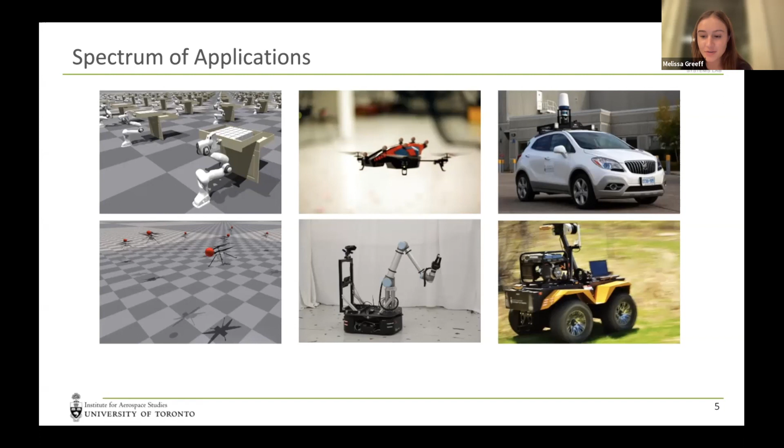However, there are a lot of challenges on the road towards deployable learning controllers, and these include sim-to-real transfer, computational efficiency, and most importantly, safety. In recent years, a wealth of research has explored how to extend safe and robust control frameworks with learning, and how to scale RL beyond toy problems while encouraging safety.

Let us look at a few different approaches very briefly. Classical control approaches fall into a category of model-driven approaches, and they typically consider a set of predefined robot dynamics and environments and design controllers for those conditions. Only a small portion of the world can be accurately modeled, and there is a clear boundary between what can be accurately modeled and what is safe and what cannot be accurately modeled. So it is possible to give guarantees within specific contexts, but generalization, for example to new operating conditions, is very challenging.

In the second set of approaches, or data-driven approaches, they learn a model of the world over time by collecting data. However, there is usually no clear boundary between what can be accurately modeled and what cannot be. So this can allow for high generalizability, but providing guarantees is usually challenging. Finally, the combination of the two promises generalizability and guarantees. Using a model and learning together allows us to improve the model of the world over time by collecting data through explorative actions with a predefined risk.

Thank you so much. Antonio, currently at UC Berkeley, also worked with Professor Scaramuzza in Switzerland. He was one of the co-organizers of the DodgeDrone competition this past weekend, I think. Their work essentially was one of the sources of inspiration for our competition, and he was very instrumental and helpful in organizing and defining the initial prospects of this competition. So please.

Thank you. Yeah, I guess you can see my screen. Otherwise, please tell me if there is any technical problem. Yeah, so my name is Antonio. I'm now a postdoc in Berkeley, in the Berkeley Artificial Intelligence Research Labs. I work with Jitendra Malik, basically at the intersection of computer vision and robotics. I've had a little bit of experience with IROS robotic competitions. I'm very happy to be involved in this one. And I'm now trying to explain why. Why do I like competitions?

I'll start basically with this statement that drone navigation is a research problem. It has many applications like search and rescue, delivery, exploration. It is very important because most of the time we have perception-based control, right? The drone has to learn from its senses where to go and how to get there. And these systems are safety critical because if they make a mistake, things are going to go bad. Drone navigation, in particular in this application I'm showing here, is one of the places where 98% usually is not enough, right? If 2 out of 100 times your drone falls down out of the sky, then it's going to be a problem for the products you're delivering, or could be a risk for the people working around.

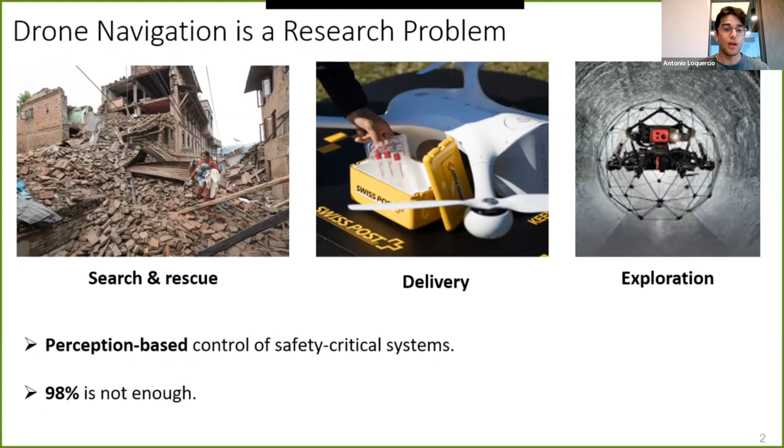So the thing is that we are still in a very open research area where core components are still unclear. It is unclear what kind of representation we should use for our navigation algorithms, for perception navigation, like explicit ones such as maps, metric systems, VIO, or more implicit ones like what we get from a neural network.

Also, it's unclear what kind of sensing best fits a drone for which kind of task, like RGB, depth, or small lidars. And again, what should we prefer? A more generalizable learning-based approach or a more safety-constrained model-based approach?

Basically, what we would like to understand is where to be on this line between end-to-end, usually pursued by big companies like DeepMind and OpenAI, and the classic perception-planning approach, which is instead the forefront of all successful robotic companies.

So that's why, to answer this important question, I think competitions are very important, and the reasons are clear. These are probably the thing that made the computer vision and natural language processing community make so much progress in the last decade — the fact that people have standard metrics so we can compare according to the same numbers, sequestered test data, and public leaderboards. So when I write a paper, I don't have to go and run your code again, the numbers are going to be there.

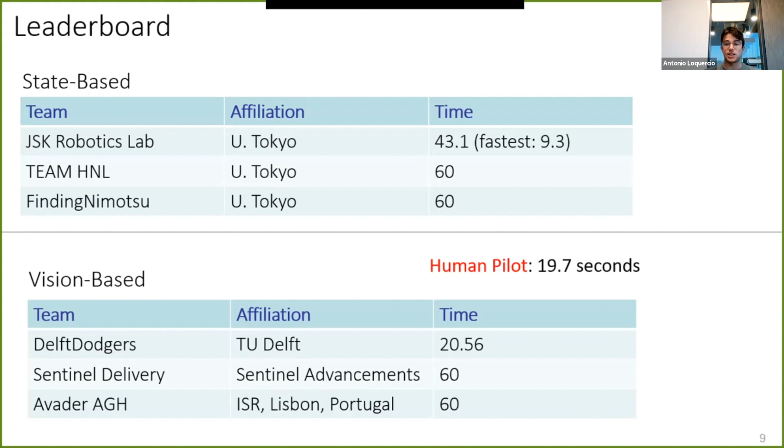However, something I would like to show is a video. Let me see if I manage to play it. No, okay, so the video does not play, I'm sorry, classical technical problems.

Competition is good for research, but also for the networking aspect of it. And also something else I did not expect from the Dodge Drone competition is that it had a much greater educational value than what I expected. I keep receiving emails from participants who, for example, want to use this as part of their CV for grad school applications, or people who want to use it for writing papers, this kind of stuff. So I think this is maybe even more important than the competition itself, like motivating students to get in touch with the problem.

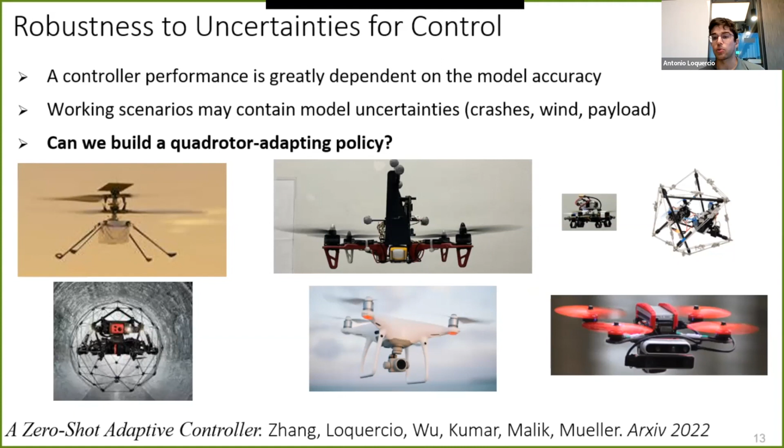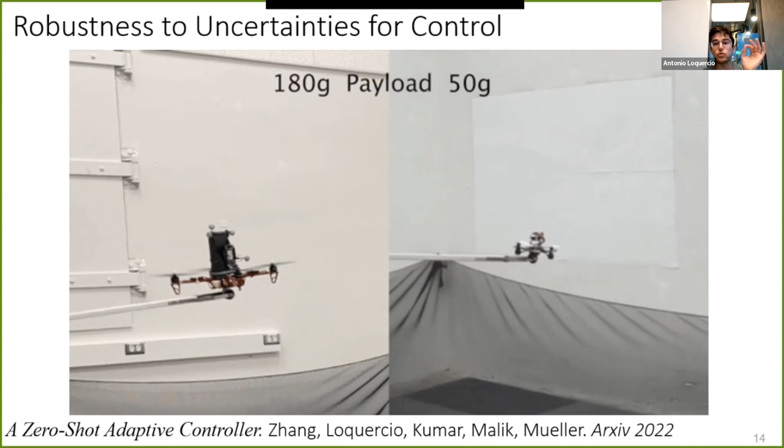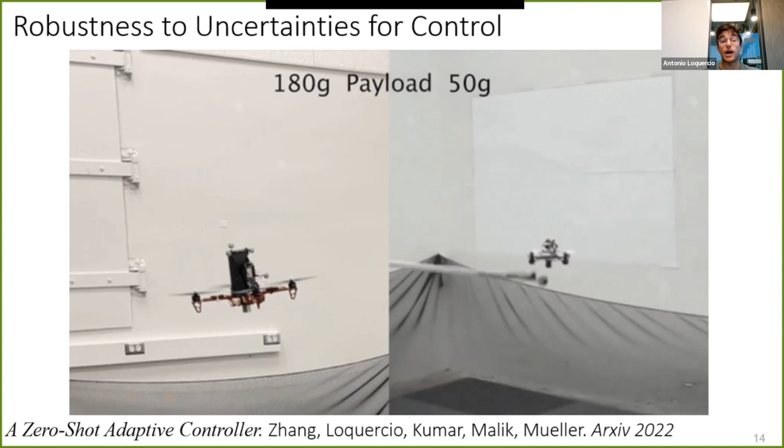And this is also very important for applications, because these uncertainties are problems when, for example, we crash, some propeller gets damaged, there is wind, or a payload is hung. We basically studied this problem - it was one of the first problems we addressed when I arrived here in Berkeley. We approached it using reinforcement learning, and we found out, I was actually very impressed, extremely good results. We had to use particular approaches for allowing the policy to adapt to the quadrotor. But I was really impressed that a single policy could control basically all kinds of quadrotors that we presented to it. It was also robust to disturbances, mass uncertainties, us pushing and pulling the quadrotor. So it was actually very good.

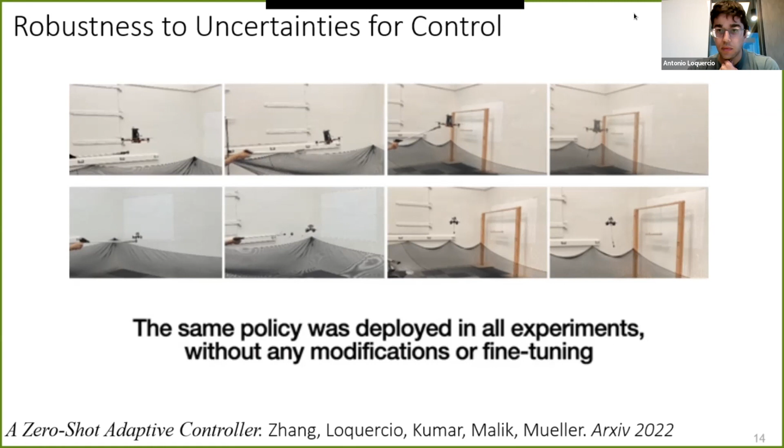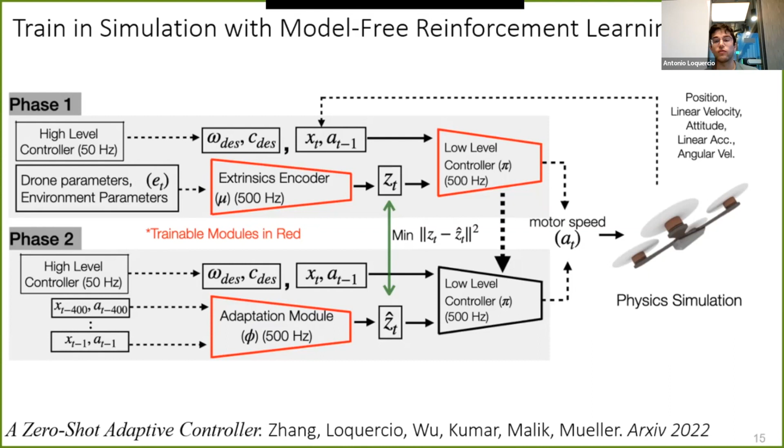We trained it with model-free reinforcement learning, PPO, in a 2-stage procedure. In the first stage, we trained the policy with information about the drone parameters, like its mass, center of mass, the strength of the motor, and so on. Then in the second phase, we estimate a latent representation of these parameters, a form of latent system identification, using a history of states and actions. So really as simple as that.

My biggest surprise was that, particularly in the most difficult cases, like when we would push the drone, or some of the motors would fail and have a loss of efficiency, our approach worked much better than traditional adaptive controllers, like the L1 adaptive controller, both in terms of success rate and in other metrics, like how well it keeps its height.

That work was really inspired by that competition. So to quickly conclude, I think competitions are extremely good. They foster progress, as they did for me in this last work I presented, but they're also very important for education and networking.

This is a bit of advertisement for my latest work, which surprised me in the fact that reinforcement learning policies can learn very robust approaches that are robust both to extrinsic factors, like wind, or intrinsic factors of the drone, like changing hardware. With this I conclude. Happy to take questions, and thank you for your attention.

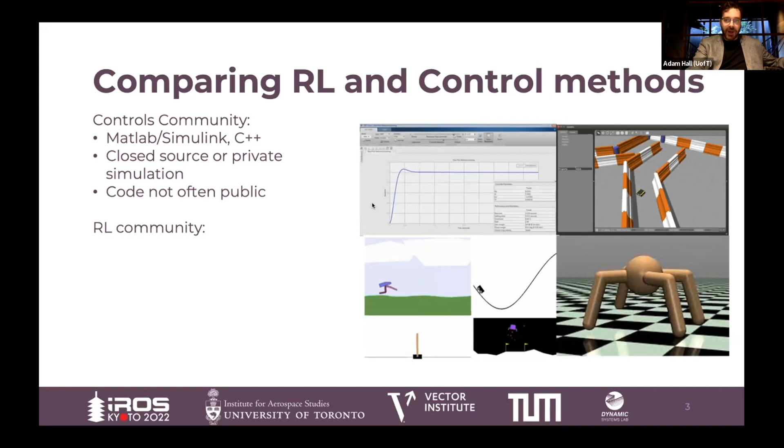There's a problem, however, as tracking progress in this field has been very hard across the two communities. One reason is the controls community likes to use tools like MATLAB, C++, and often closed-source simulators, and their code isn't made public as frequently as in the reinforcement learning community. The reinforcement learning community likes to use Python, PyBullet, OpenAI Gym, more open source, and different types of simulators. What we've seen is it's really hard to make comparisons when these algorithms are implemented in different code bases and software suites.

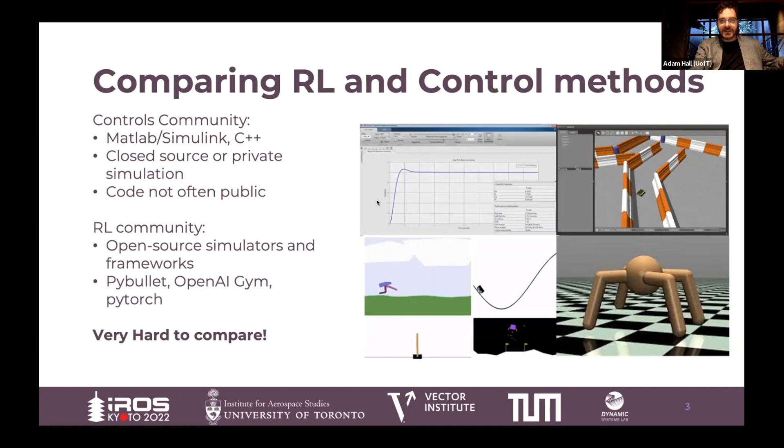This was a major motivation behind Safe Control Gym. The idea is Safe Control Gym is an environment for both the reinforcement learning and control communities. Our framework provides a symbolic prior model of the dynamics for each of our environments, as shown here: the cart pole, the 1D quadrotor, the 2D quadrotor, and the 3D quadrotor, which many of you used for the competition. These symbolic prior models are really important for many control-based approaches.

In fact, they're often required as some sort of prior model. So additionally, we provide physical and dynamic disturbances, such as changing the mass properties of the system or injecting noise onto the inputs or observations. One example here is changing the pole length of a cart pole, and there are many others you can implement through Safe Control Gym.

Additionally, we also provide symbolic representations of safety constraints, like state constraints and input constraints, which is not commonly found in other gym environments. Our framework is freely available on GitHub, as many of you know, and we encourage contributions, as many of you have already started to do.

In more detail, Safe Control Gym can be broken down into controllers that interact with environments. Environments are initialized with a visual model defined from a URDF file in a PyBullet environment. The user defines these through a YAML file interface, a common Python-style format, though not limited to Python. Through this YAML file, they can also define a specific task they wish to perform, such as stabilization or trajectory tracking. A symbolic model is also generated alongside the PyBullet model, acting as a prior model that the controllers can use.

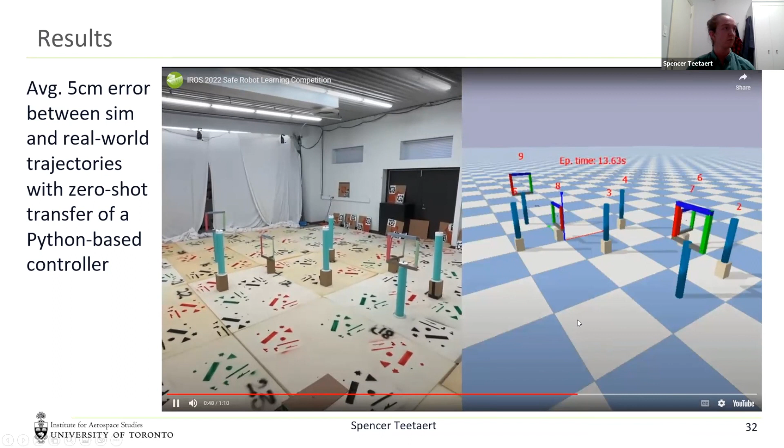Effective Sim2Real of a gym-like environment is a very powerful enabler to research in control and model-free RL. So future work for this project includes working with Bitcraze to merge our PyCF firmware with their Python wrapper into the main CF firmware branch, doing more work developing controllers with and validating the Sim2Real pipeline, and the addition of more advanced state estimation.

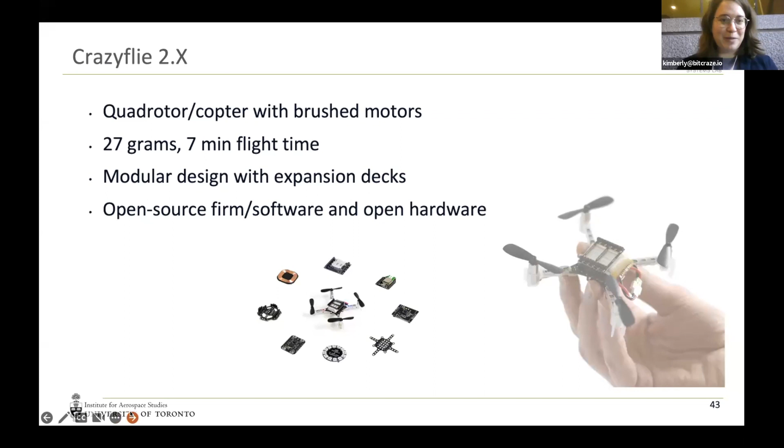Okay, so I'll explain a little bit more about the decks itself. We have a flow deck, for instance - for the competition itself there was motion capture, but you can also do positioning, relative positioning, with optical flow and a range sensor. So the flow deck, or technically the flow deck version 2, has an optical flow sensor and a range sensor, and then you're able to make it fly without any external positioning system. So you can fly it at home, which is really handy.

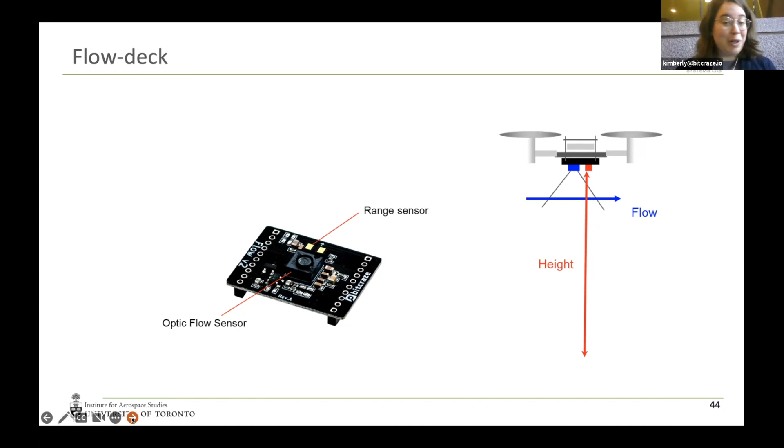Something I also presented during the ROSCON presentation last week was the multi-ranger. I combined that with Crazyswarm2 to do a little bit of SLAM, off board of course - I connected it with the SLAM toolbox. Technically you have 5 of these time-of-flight 1D sensors pointing in 5 different directions, and you can either make a map out of it, or just do very reactive obstacle avoidance with it as well. I used them during my own PhD research to do wall following, so they're all fun to work with.

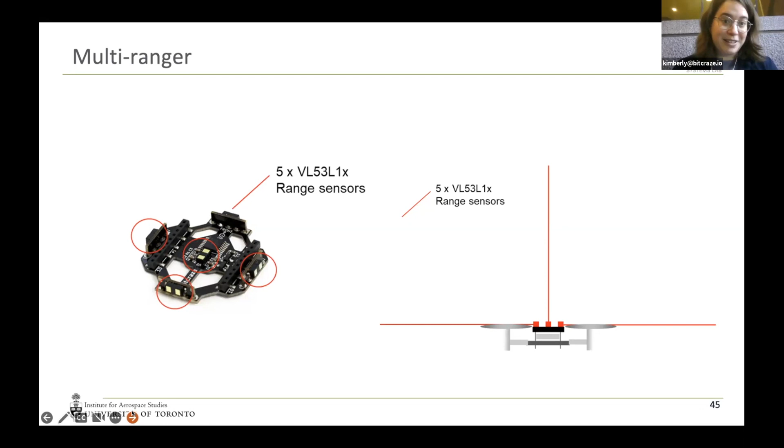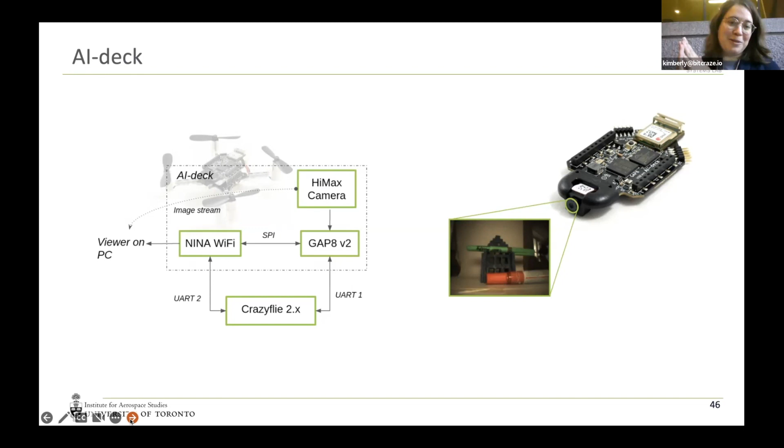So that's very much the hardware. The prizes I'm going to present for first, second, and third place are a combination of those 3 decks and, of course, a Crazyflie. So if you can go to the next slide, I will present the prizes.

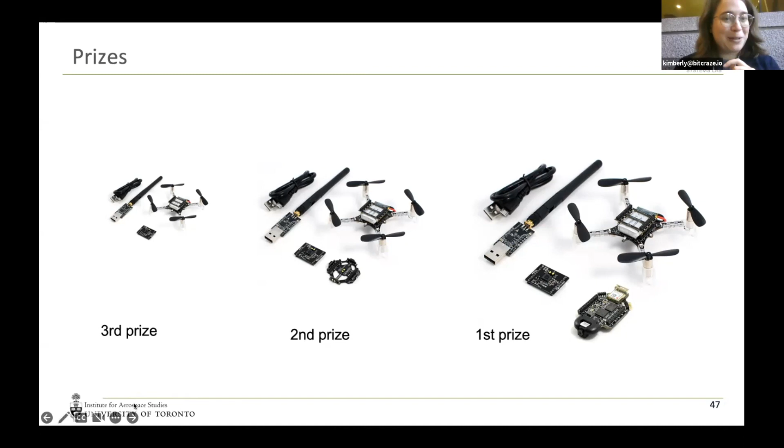Yeah, and I know Wolfgang was on paternity leave. Yeah, he's coming back soon. But I've been, if you look at the commits, I've been pushing a lot of commits. Nice, we'll be in touch with that.

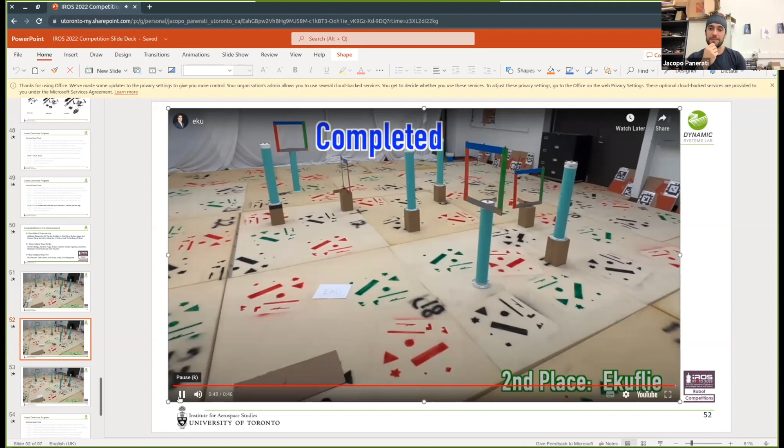Thanks, I think Gerardo is the one - can you hear me? I can hear you, and you should be able to share a screen. Okay, give me a second. Thank you. Can you see a presentation there? Okay.

First of all, thank you for the competition. It was really fun. We're team Ekuflie. We are all members of a company called Ekumen, that's where our name comes from.

We are a company that develops software for robotics applications, usually around ROS, and we also have software development for other areas such as mobile and in some cases web, but very frequently also related to robotics.

As part of the company, we have a small interest group we call research and development, that we use to research topics that maybe we don't find every day in projects, that we are interested in learning about, so we take the chance to do development and research around those areas. We have lately found that competitions are a very good vehicle for that, because they provide us with a very scoped problem that we can research and try to solve.

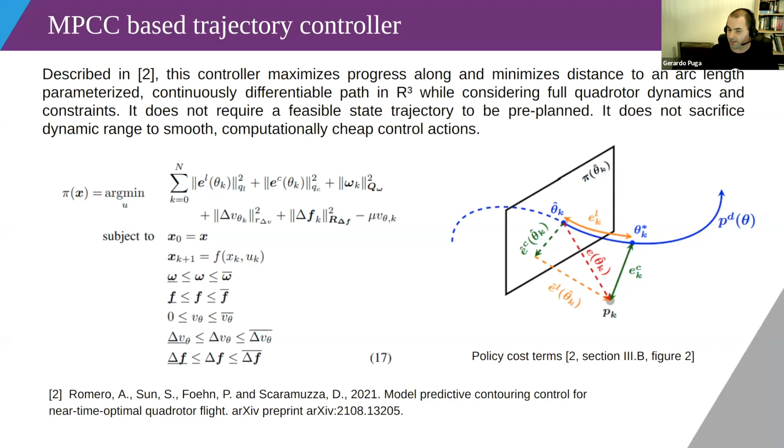For that, as I said, it is an MPC type of controller. It has a function that needs to be minimized on each iteration. Once that function is minimized, the control action that results from that optimization is usually applied to the system — in this case, the drone.

For MPCC, the three main costs associated with the function that is minimized are the contouring error, the lag error, and the progress cost.

The contouring error is the tracking error, or the distance from the drone to the path that we want to follow. The lag error is the distance along the curve from the drone to a point that is moving along the curve that we want to minimize. We want the drone to keep up with that point moving along the curve.

The progress cost is the incentive for that point to move as fast as possible along the curve, and that's the one the drone is chasing.

There are a number of other costs also in the cost function. Those are mostly for smoothing the control actions. In our case, we also have some others to improve the tracking when we were near obstacles and when we were getting through gates.

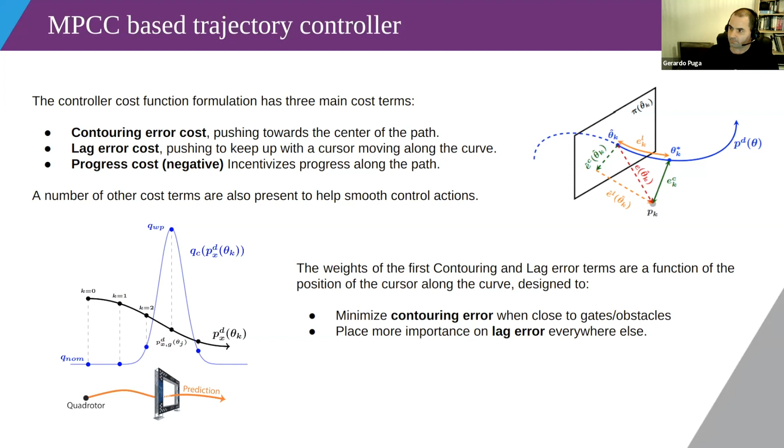We have a number of implementation considerations. The first is something I already mentioned: since this is implemented in Python, the algorithm that does the replanning, as proposed in the paper, is too slow to execute in real time in our case. That's why we decided to only do it once at the very start of execution.

Initially we wanted to do it in real time. That proved to be not feasible. Even though we applied as many optimizations as we could, reduced the number of samples generated, solved as many expressions as possible in closed form, and simplified collision checking, we still could not execute it fast enough.

So we decided to execute it only once, and that had a cost for us, because since we cannot replan while moving from gate to gate, we cannot replan once we know the true pose of the gates. So we needed to come up with an alternative solution to this.

The solution we came up with is to apply a small patch to the curve when we are close to the gate. We basically add a Gaussian function to the pose of the curve with a correction to the true pose of the gate when going through it.

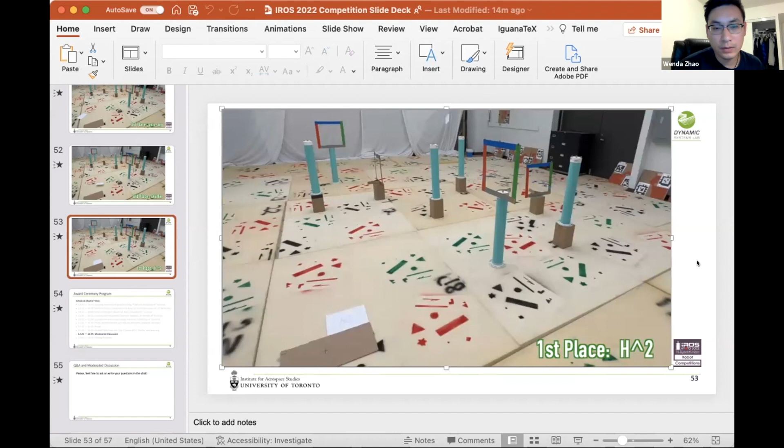Okay, so this is team H Square, which got first place in our competition. In the real world experiments, it's actually pretty promising, and it executes the trajectory without collision in the shortest time.

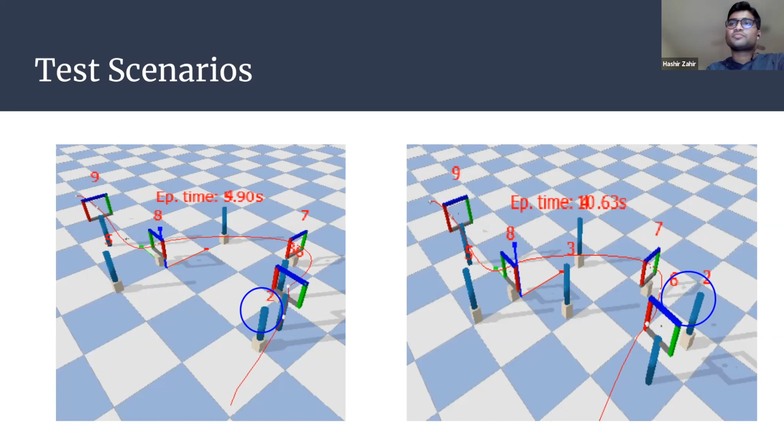Looking at some test scenarios, we can see that even with obstacles pretty near the gates or directly in the path, in general the newly generated spline is relatively smooth, and the drone is still able to travel at reasonably fast velocities.

Okay, now I'll pass on the time. Hello, yeah, so I'll go on to talk about the waypoint interpolation methods that we use.

So instead, we decided to go with the quintic polynomial to stitch all the waypoints together on all 3 x, y, z axes. This allows continuity in position, velocity, and acceleration of the drone.

So as for the yaw direction of the drone, we decided to make sure that the yaw is always tangent to the trajectory, such that the drone is always facing forward in the direction of travel. This is because typically for drones, there's a camera mounted, and we wanted the drone to face the direction where it's going and to be able to see what's in front of it.

We also had a constraint by setting the path to be perpendicular to the gate when it's going through the gate. Because the yaw direction is determined by the tangent of the trajectory, this constrains the first derivative in the quintic interpolation.

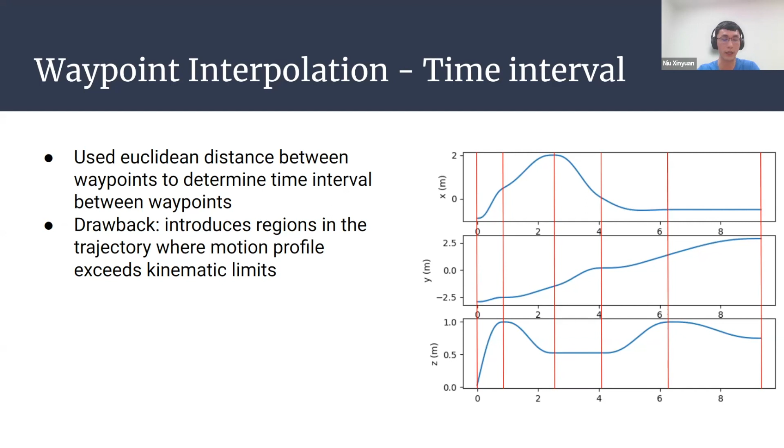So as for the motion profile, we decided to use a linear segment with polynomial blend, more commonly known as an S-curve motion profile. We have kinematic limits of velocity, acceleration, and jerk. These values for velocity, acceleration, and jerk are actually user-defined limits.

Of course, if we define them based on the model parameters, they will be the best, but you do not have to define them perfectly. There can be some amount of error there, and this will also be dealt with in the later parts.

The reason why we went with this kind of S-curve motion profile compared to a polynomial profile is because the S-curve profile will actually spend a much longer time at a higher velocity, and thus is able to complete the trajectory at a much faster rate than a polynomial motion profile.

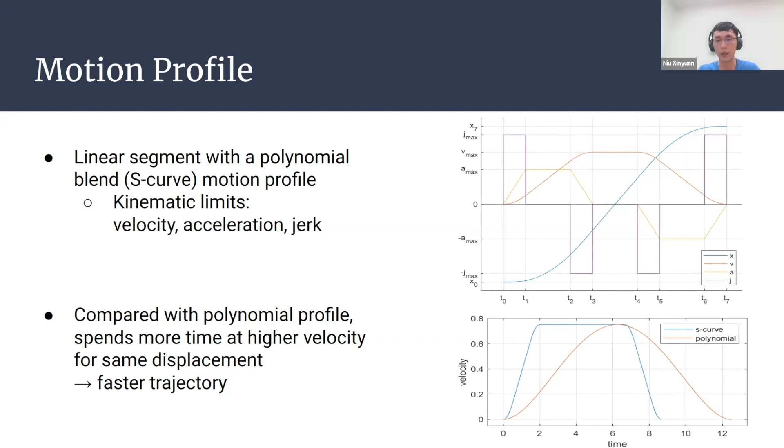This final trajectory is actually scaled by the total path length of the interpolated path to ensure that the kinematic limits are being met.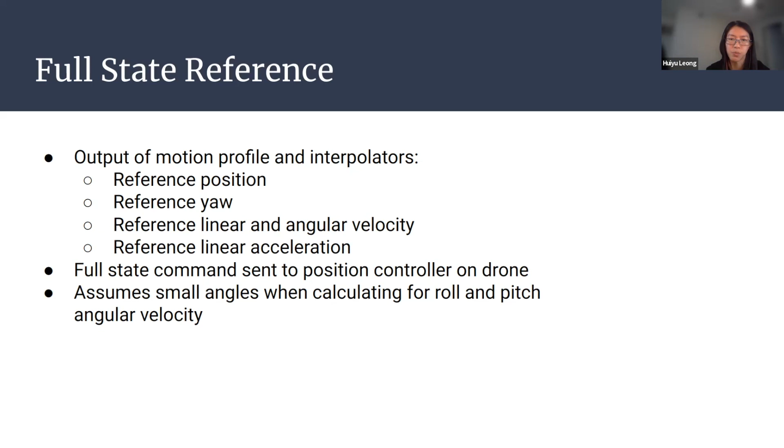Next slide, please. During the challenge, we found that our observations could be noisy at times. If given more time to work on the challenge in future, we would implement Kalman filtering for the feedback of the sensor data. That would also allow us to implement full state feedback, since differentiating the position estimates to give velocity, and differentiating twice for acceleration, would result in a large amount of noise in our state estimates.

One assumption we had to make in the obstacle avoidance algorithm was that the obstacles would be sparsely located. However, the next step for us would be to cluster the obstacles when there's a dense environment so that the drone can go around them. Another area of exploration would be to use RL to complement our planning algorithm by learning the drone commands under environmental disturbances. Next slide, please.